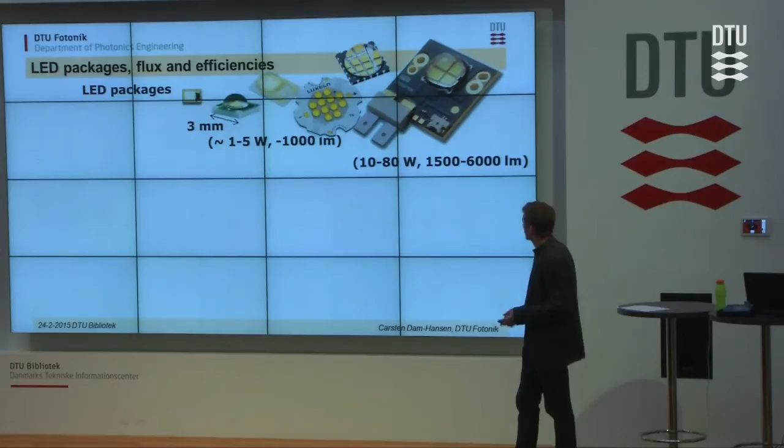You can also make arrays of these single chips, so you can have very large arrays that can run at very high powers, even more than 100 watts of electrical power, and you can get very much light from these. With respect to what color temperature or what tone of white light you can achieve from these light sources, I will only look today at white light LEDs.

That is blue LEDs that are equipped with a phosphor material that will convert some of the blue light to red and greenish light, so that we get white light from these LEDs. You can get all different kinds of color temperature from these white LEDs.

And taking the 60-watt incandescent light bulb again, it has a color temperature around 2700 Kelvin, so we consider that as being warm white light. In LED, we consider the range up to 3500 Kelvin as being warm white.

And if we look at the efficiency of these kinds of LED packages, then from the data sheets you will get, at a specific current, here 350 milliamps, a specific total flux, and you can calculate that to an efficiency. And for these warm white LEDs, you can actually get more than 110 lumens per watt.

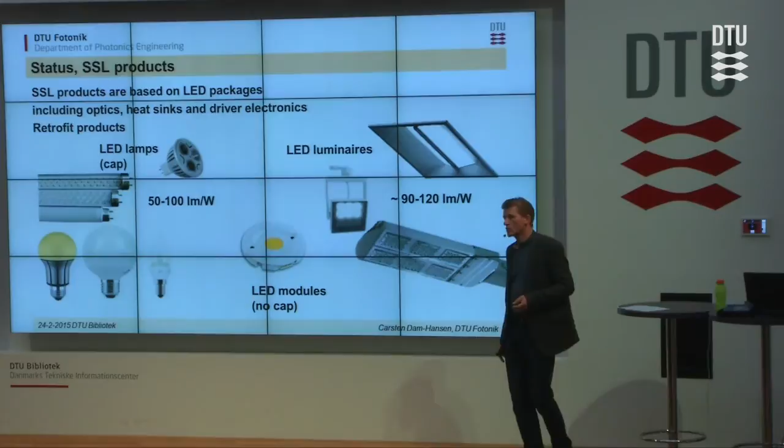So these are the retrofit products. We call them LED lamps when they have a cap for a certain installation. You can also have LED luminaires that are ready-made luminaires or spot lamps with all the driver electronics included in it. So you could have spot lamps for this that might be used in museums. You can have troffers to be used in offices, or you see more and more on the streets also street lights based on LED. We will see these everywhere.

When describing the light quality, we would actually like to be able to describe the color of the light. And we use the science of colorimetry to do this. In colorimetry, we have defined some color matching functions that actually is just a mathematical description of how our eyes sense the different colors. So we have 3 different colored sensors in our eyes, and they are described by these 3 color matching functions. We'll not get into detail with this, but just show you this chromaticity diagram that shows the color of the perceived light from some specific light source.

And within this perimeter, we have all the colors that we can perceive with our eyes. And on the perimeter here, starting down here, we have the saturated blue colors. Up here, we have the saturated green, and it goes to the yellow and the reddish. Today, we are interested in white light from LEDs, and white light is concentrated in this area along this Planckian locus, we call it. So it corresponds to a thermal light source that you heat to a certain temperature. So it could be an incandescent light source.

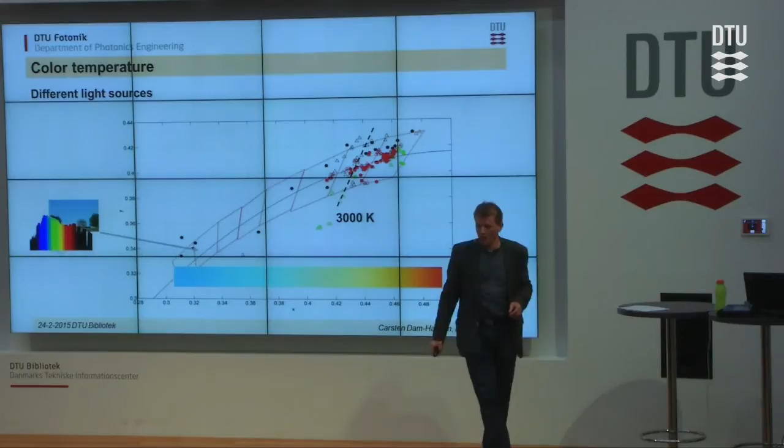So if you look at daylight from a clear blue sky, you would have a spectral power distribution that looks like this. The chromaticity, or the perceived light, would in this diagram be down here in the cold white range. If we look at the halogen light bulb that we took as an example before, it has this smooth spectral power distribution. It has a color temperature around 3000 Kelvin. It will be positioned here. And if we take the example from before, from Rosenborg Castle, the display cases used these 5-watt incandescent bulbs. And the color temperature of these is 2200 K. So it's very, very reddish, warm white compared to the 60-watt incandescent light bulb.

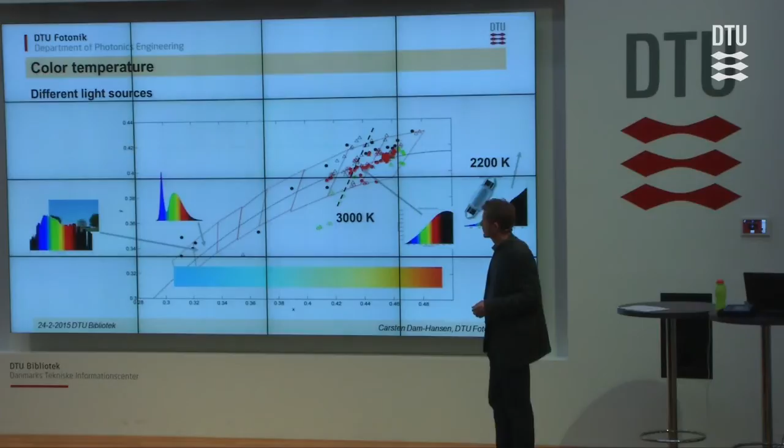So let's see, where are the LEDs in this? So you can get cold white LEDs with this marked blue peak. They all correspond to the daylight spectral power distribution. So these 2 spectral power distributions could give the same light impression, but they are actually totally different in the spectral power distribution, and they will render colors differently, but we'll get back to that part of it. You could have something at 3000 K that looks like this. Now the blue peak is less marked, and you have more red light in this, actually saying that you have a better color rendering of the red objects. We'll also come back to that.

You can change this. You could have even less blue light from these white LEDs, and you could have warm white that corresponds to this 60-watt incandescent light bulb. And the last example I have here is the color mixed LED light that we made for Rosenborg Castle. It had exactly the same visual appearance as the 5-watt incandescent light bulb. So they would be placed at the same place in this chromaticity diagram, describing the color that we see with our eyes from these light sources.

So let's get back to all these points. These are measured chromaticity for a lot of different LED lamps that we took from the Danish commercial market. It was in the years of 2010 to 2011. We measured a lot of these directional LED lamps to be run at 12 volts. A lot of museums were interested in using those kind of light sources because they were using 12-volt halogen light bulbs in many of their exhibitions.

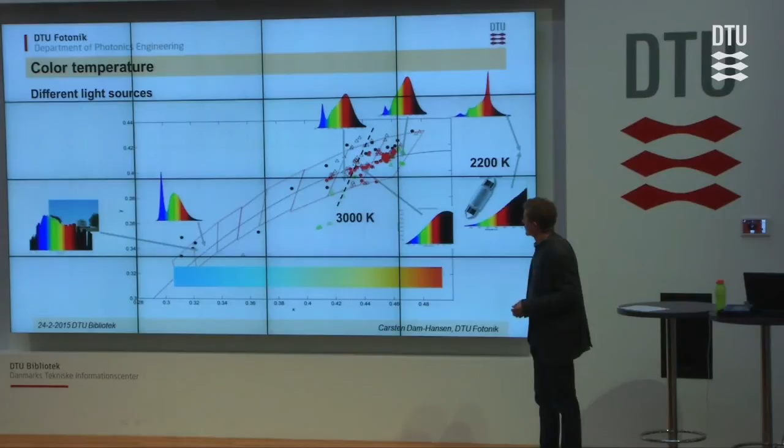But one of the things to note here is that some of these green points, even having a very high color rendering index, and should be good white light to be able to differentiate different shades of colors, actually are lying far from what we consider as being white light. So these LED lamps actually have a reddish tint. And if you compare them to a halogen light source, they will seem very reddish. And some people might not think that is very good.

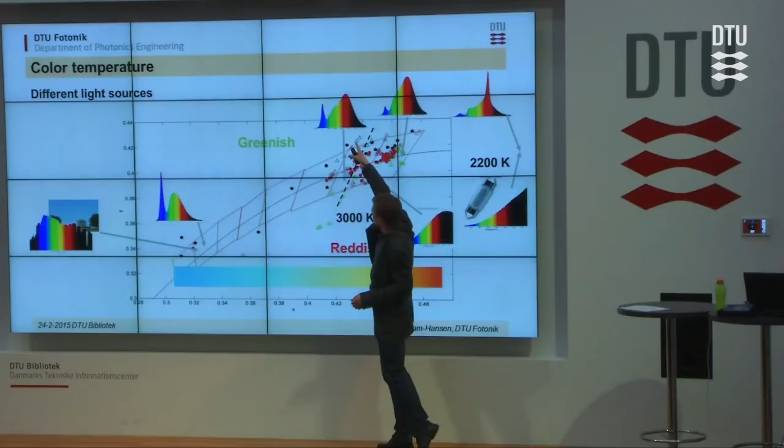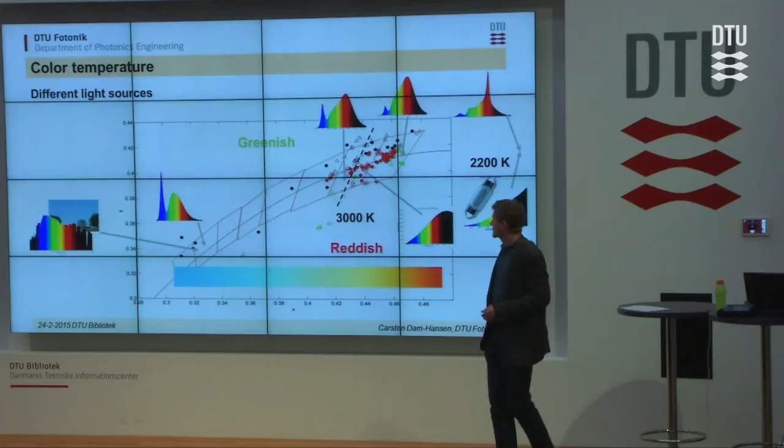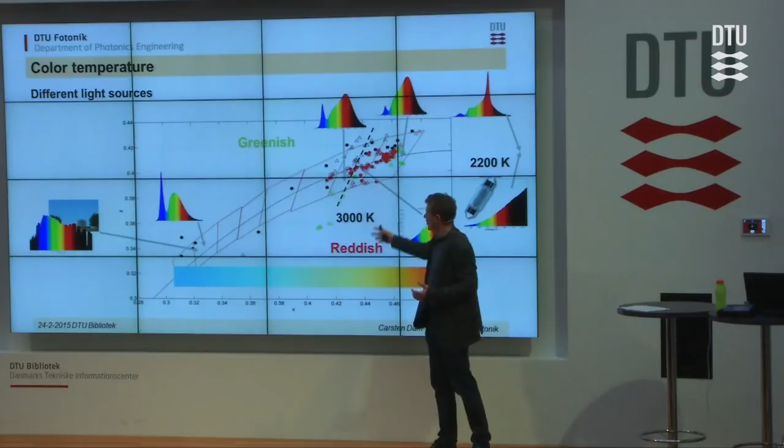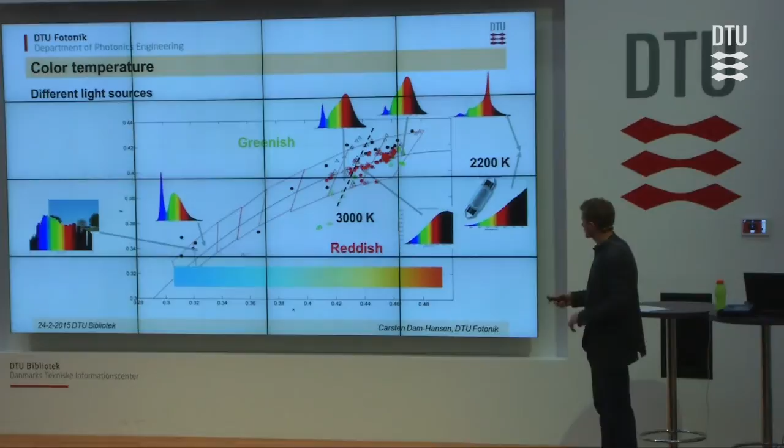Some of these light sources are lying on the other side, on the top side of this Planckian locus, as we call the white light line. They would be on the greenish side. So actually, we need to know from these light sources what color temperature they are, where they are along this line, but we also need to know, are they on the reddish side or on the greenish side? Because people will be able to see this tint of light. Scientifically we describe this by a measure that is called DUV. We'll not get further into that.

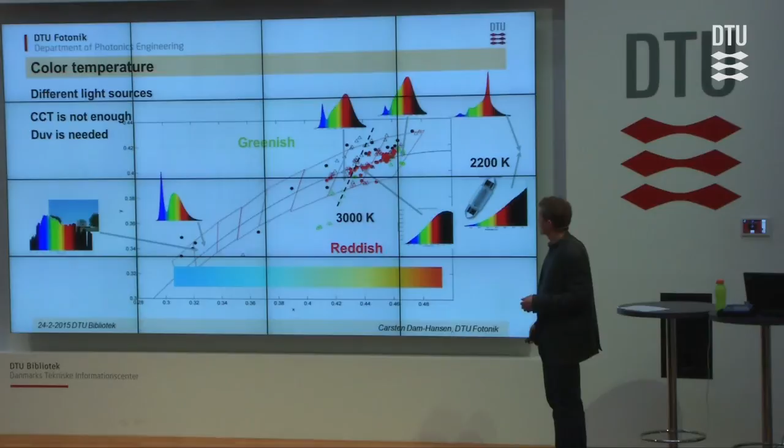As I said before, in this chromaticity diagram, we can easily have two different spectral power distributions that actually produce the same visual appearance, but they will have different color rendering. So here I've taken 3 LED lamps that have the same color temperature. They are all at 3000 Kelvin, corresponding to being able to replace a halogen light source. But they have very different spectral power distributions, as you can see here, and they have very different color rendering.

So you can see this top one has a peak which is in the yellow range, and this bottom one has shifted its peak from the yellow actually to the red. So there's much more red light in this lower LED lamp spectral power distribution.

And in describing the color rendering, in this case where we have a color temperature of 3000 K, we're actually comparing with a halogen light source or something very close to it. And a halogen light source has a lot of red light, so to be able to give the same color rendering, we need a lot of red light. So that would imply that this LED lamp containing a lot of red light would have a high color rendering, and that is the fact also.

It has a color rendering index of 95, which is very good. The maximum would be 100, so we're very close to getting the same color rendering as the halogen light source. And the top one has a much lower color rendering, only 69, and it would not be appropriate for many applications.

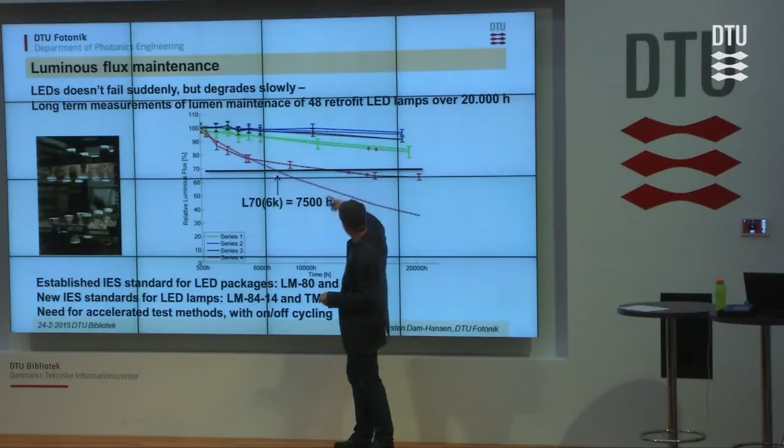That is what is traditionally used for describing the lifetime or the maintenance of luminous flux. So you would state a luminous flux maintenance time or corresponding lifetime to be around 8,000 hours. And we measured something like 12,000 hours for this. So that is far from the 25,000 hours that many of the producers actually say these products can do.

So if you buy some good products, you can get LEDs that last very long, and the lumen depreciation is very low over these 20,000 hours. But you can also be unfortunate and buy something that will burn out much earlier.

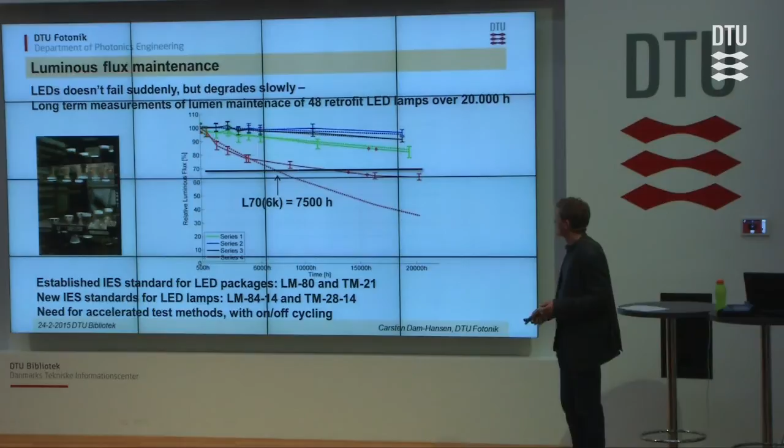Now let's look at the color temperature. We would like the color temperature to remain the same, so the visual impression of the exhibition is the same over time. So we took these measurements and used colorimetry to calculate the color temperature, and you can see for the blue and the red line here, it is very stable. It doesn't change by more than 30 or 40 Kelvin, and you would not be able to see that with your eye. So that is very good for these two LED lamps.

However, for these other ones that start at 3000 K, you can see the black line actually increases in color temperature, and the green line decreases in color temperature. So that is not very good. The black line starts from around 3000 Kelvin and goes to around 3400 Kelvin. So that would easily be visually

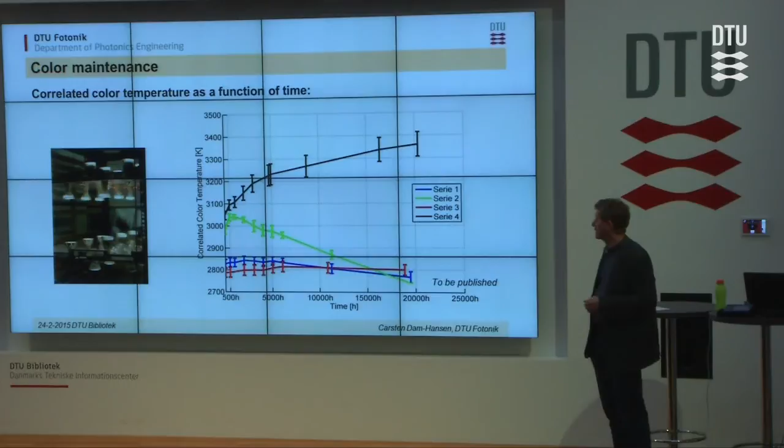seeable. So if you put a new lamp and an old lamp together in this exhibition, you would be able to see a large color change, and you are not interested in this. So museums would like to get away from these types of products.

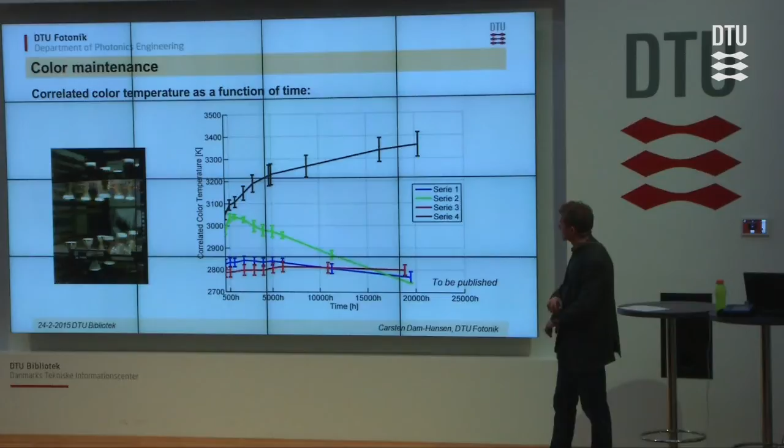You could look at this in a different way. You could use the chromaticity diagram that I showed you before. And here, if we take this black line, in the beginning we had 3000 Kelvin white light that corresponds to the halogen light source. And you can see it starts off very nicely, exactly on the Planckian locus, what we consider white light, but then it deviates from this, and it moves up to higher color temperatures.

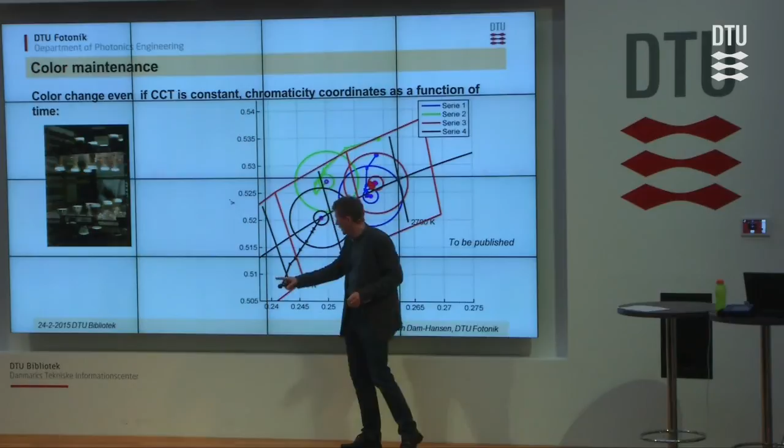And you can see this graph actually contains data from up to 28,000 hours. I didn't have that on the previous graph, but it shows that it's very far from where it started. You can see the red lines here. They're all situated within this small red circle,

and the small red circle actually sets the distance for where we could see a visible difference. So if it is within one circle here, we will not be able to see a visible difference. So this red LED lamp producing these red points on the graph would be a very good LED lamp for this.

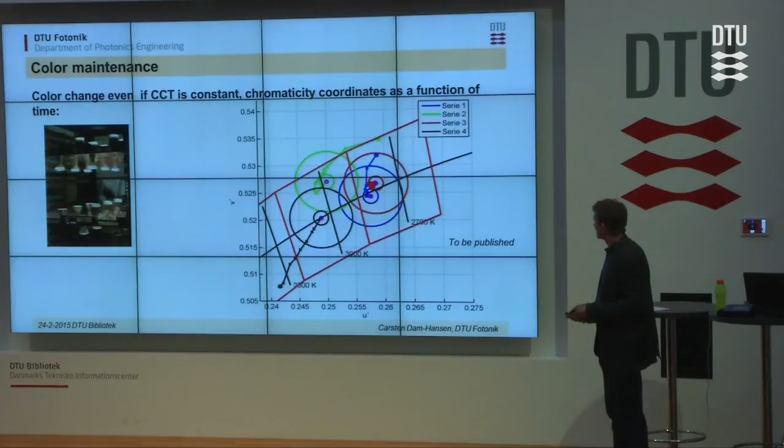So this leads us to the test and characterization. You can see there are many of these issues with LED lamps that need to be measured. It's not like traditional light sources. With a halogen light source, we would know beforehand what the spectral power distribution was, because it's determined by the physics. But LED lamps can be made in so many different variations, in color temperature, in color rendering, different spectral power distribution. So we actually need to be able to measure all these characteristics of LED lamps and LED components.

So at DTU Fotonik, actually at Risø campus, we have developed a totally new photometric lab that contains large integrating spheres and a large goniophotometer that can take lamps up to 2 meters in largest dimension, and we're able to measure the spectral power distribution. We need to do that in order to calculate all these things. We can measure the total luminous flux, the electrical power, which gives us the efficiency in lumens per watt.

We can measure the intensity and color as a function of angle. So for many applications, as an architect, you need to know what is the distribution of light, and then you can put that into a simulation calculation to see if you get light where you want it.

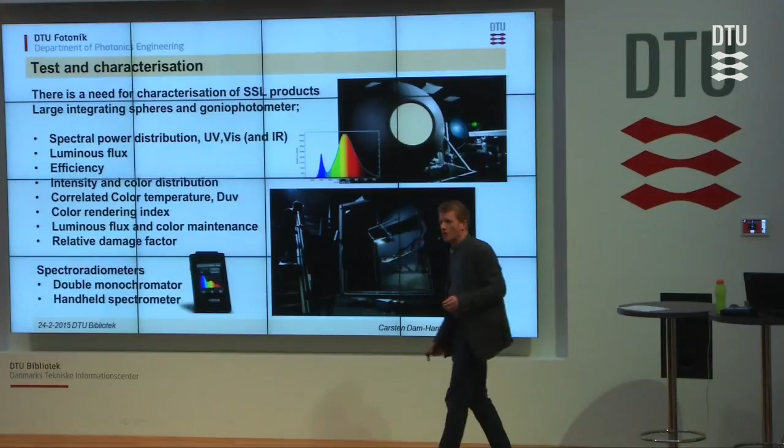And from all these spectral measurements, we can calculate the color temperature and the color rendering index. And from lab measurements, we have the luminous flux and color maintenance. And specific things like relative damage factor are important for museums, and that takes into account the UV and the infrared radiation. So we need to be able to measure UV light and infrared light also. Many of these handheld spectrometers cannot do this. In the lab, we have special double monochromators that are especially designed to measure very accurately in a very large wavelength range.

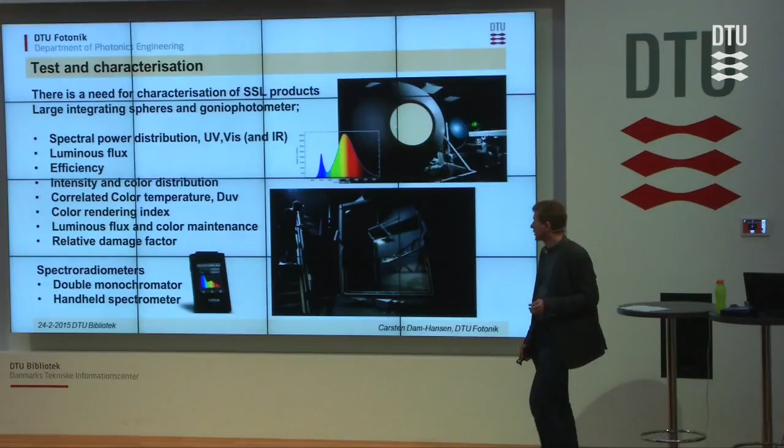When you run a test and characterization lab like this, you need to be sure that it's calibrated and that you get accurate results from your measurements. It's all based on accurate calibrations, so we calibrate all our instruments. That might be a bit strange in a university, to have absolute measurements, but we run this test and characterization lab both as a commercial lab and as a research lab. So it's also open for students that would like to come and do measurements. But we also do commercial measurements for industrial companies that are making lighting products. But we need to make sure that we do measurements as all other labs in the world.